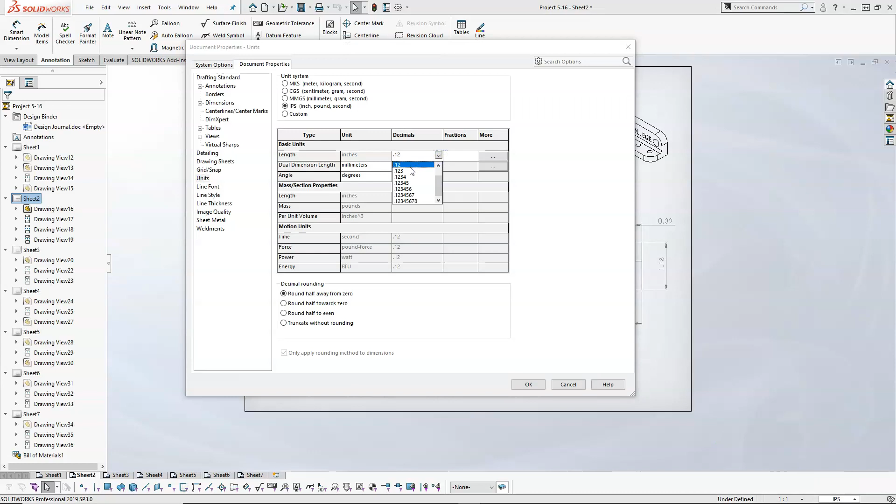Well, I'm still in millimeters, grams, and seconds. So see if that'll come back. So occasionally there's this weird thing, you have to change it and then change it back. And I'm not really sure what's going on there, but I've noticed that depending on the template, sometimes it doesn't carry over. All right, so that gives us enough to start with.

So I'm just going to go through and do a real quick look. So sheet 3, we had the steps and the pins, and then got a little carried away with the diameters there. So I have to decide: do I want to stay with the hole callout? Kind of like the through. So come over and modify that one to a 2 times.

We ended the last video on this one, and I went ahead and did pretty much the same thing to the other. So to be consistent, make sure. All right, so it's pretty difficult to get a perfect print on the first pass through. There's always a second or a third pass that is going to take you into that next level. So, one more hole callout, and one more 2 times.

So the downside to the 2 times, if this were an actual Hole Wizard item, it would give us an instance count, and it would put in the 2 for us. The problem is going to be that if for some reason we put in a third, this is going to have to be manually updated, just like the radiuses are going to be manually updated. So we're going to lose the associativity. It requires that we go back and manually change those.

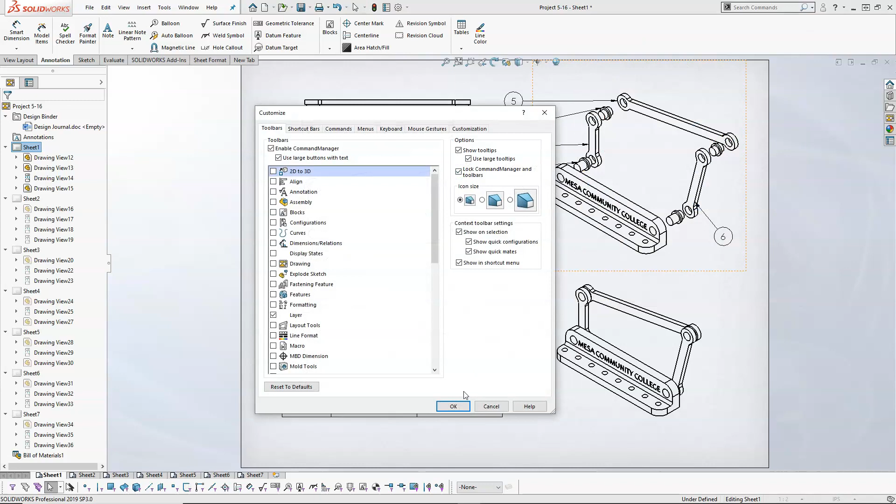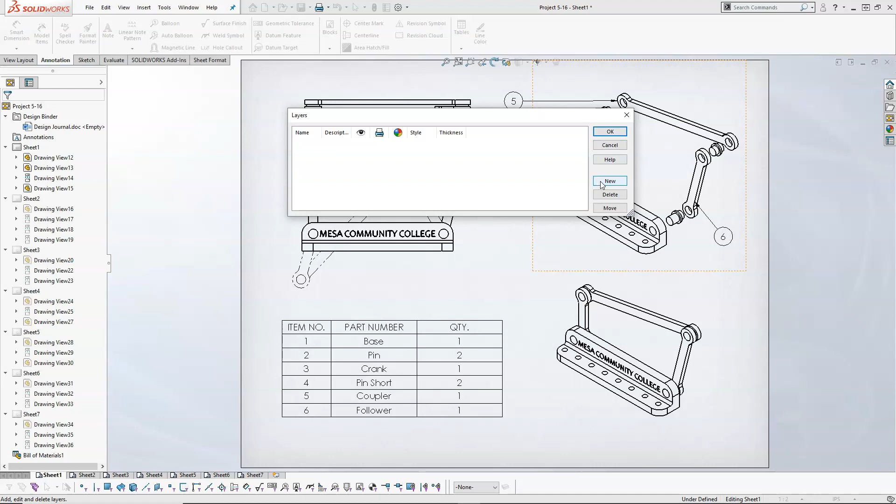Okay, so with layers, these are things that we're going to start building into our template. We're going to look at units and the standards, and go through the process of deciding what it is that we would like to have built in. So one of those things can be the layers. And so if I do a dims layer, we'll see if I can pick out my favorite color for dimensions.

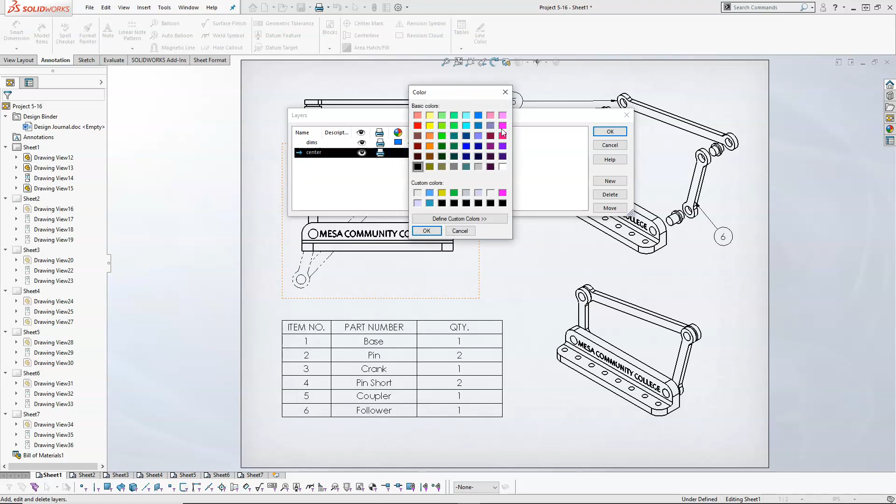And then I'm going to create one for center. And centers I like to have kind of bright in the magenta. All right, so very visible. And those give me a couple to start with. And when I activate, I can come over here and window pick, and window pick. And on the parameters on the left, we're going to be able to pick the layer for that selection.

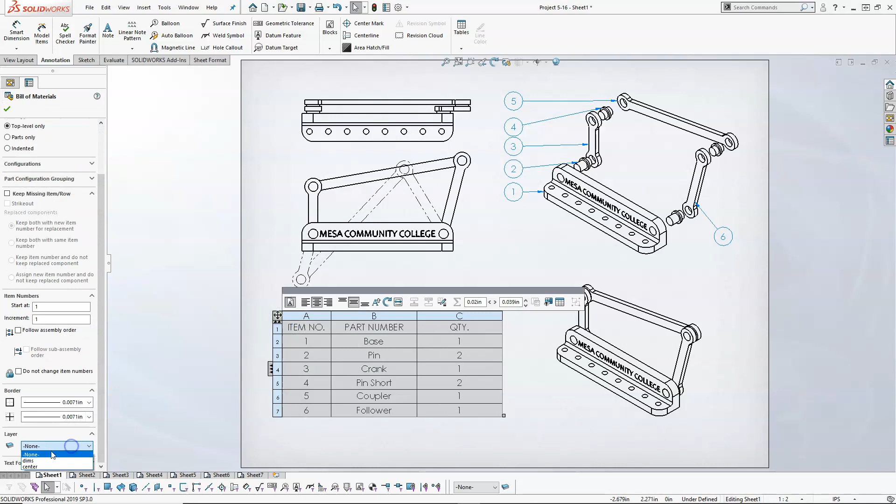So that puts it in. Pretty much can do the same thing with the bill of materials table, and it gives it just a little bit of contrast, maybe not so kind of fading into the background there.

Alright, so we have a lot of dimensions. This is where the filters can come in. If you do not have your filters on, you can hit F5 on the keyboard. There's also a view? I'm going to have to look for that one. I know there's a way to get to it, but I've always hit F5, so don't think about it.

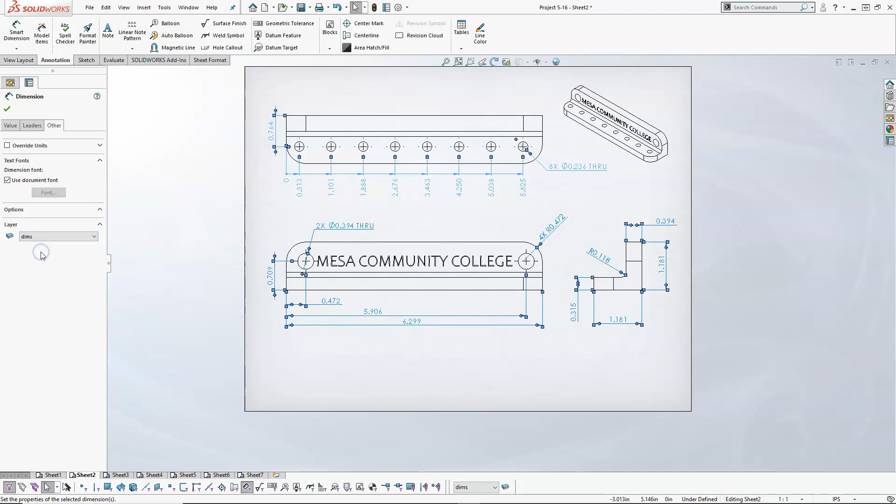Alright, so I'm going to filter dimensions and hole callouts. And when we pick, the dimensions should be the only thing that pops up. And if we go over to leaders, no, Other, then we get to the layer. So we set that to dims, accept, and that cleans it up a little bit.

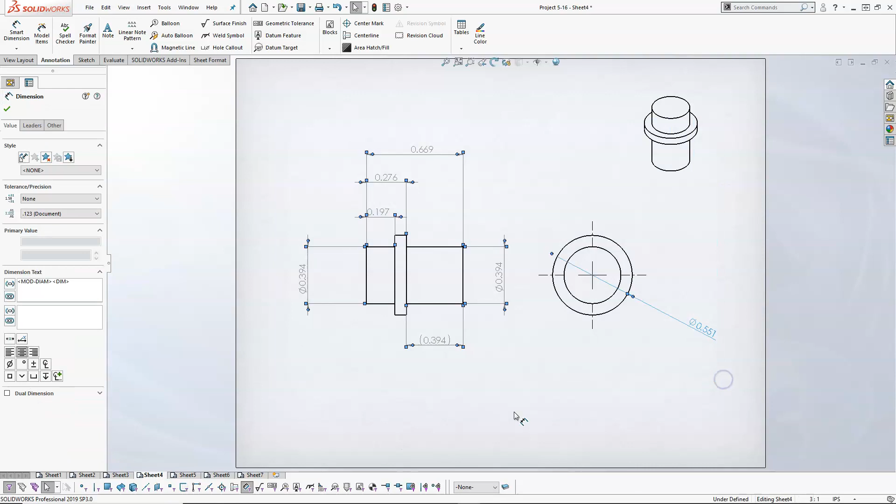So I'm going to go ahead and run through all of the sheets while that filter is on. And I can also come back to the layer toolbar and it will have the same effect. And we can update and get those to look a little cleaner. Alright, so a couple more. And one more.

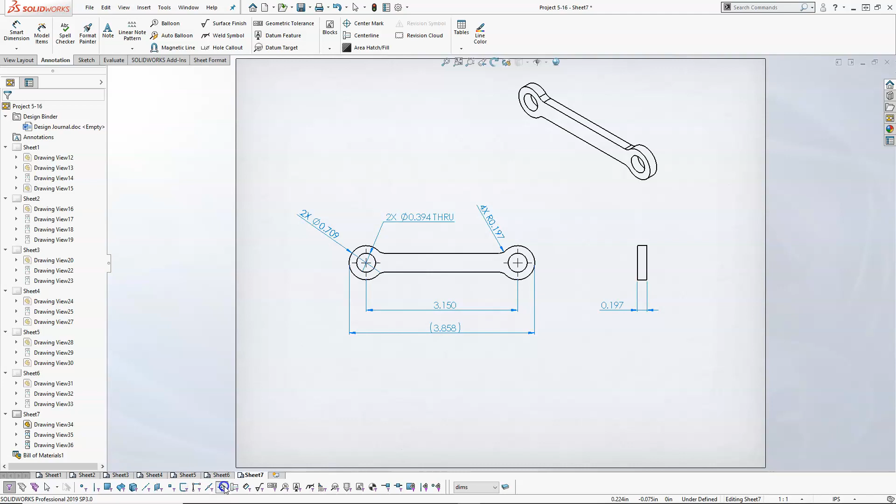Alright, so since we're in this group, I'll go ahead and turn off the dims so that I can select something else. Let's see, we do have a filter for center marks. I don't have any center lines, but center lines should also be in that group. And I'm going to set those to center.

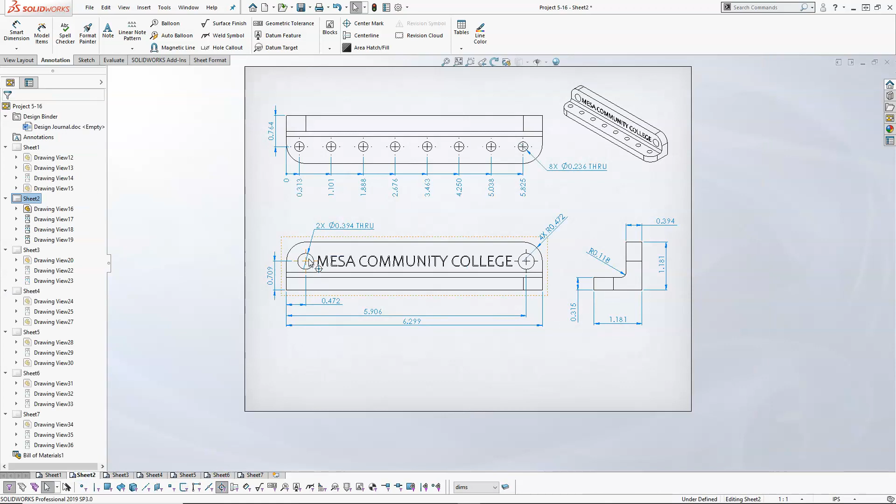And we'll just go through real quick and see if I can pick all of those up. So that one only has the one. And maybe we'll go back and we'll add a center line on those just so that we can see the process. Okay. And then pretty much the same thing. Alright, those are looking good.

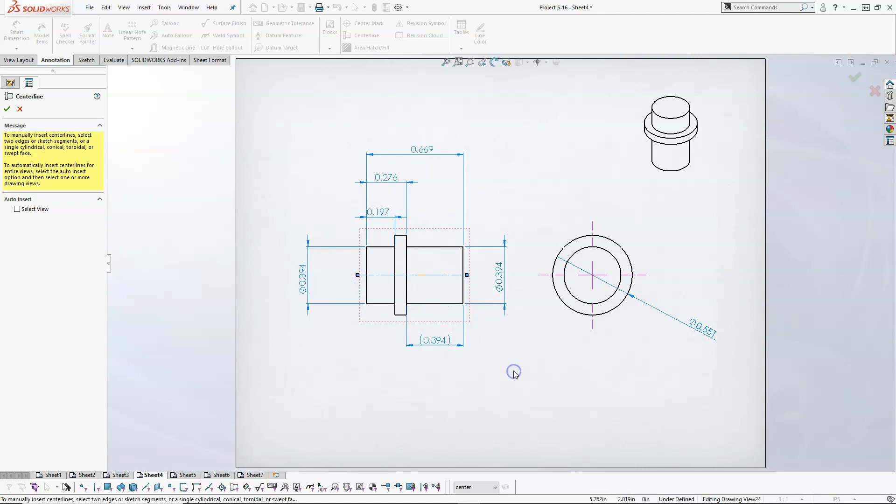Alright, so if I wanted to add a center line, again I gotta turn off my filter. We're going to set center as the current layer, and if I pick center line, I should be able to pick two objects, and that gives me the start, and then that will set my center line through the cylinder. I'm going to go back the other way. Alright, and then if I pre-select, holding down the control button, that should have the same effect.

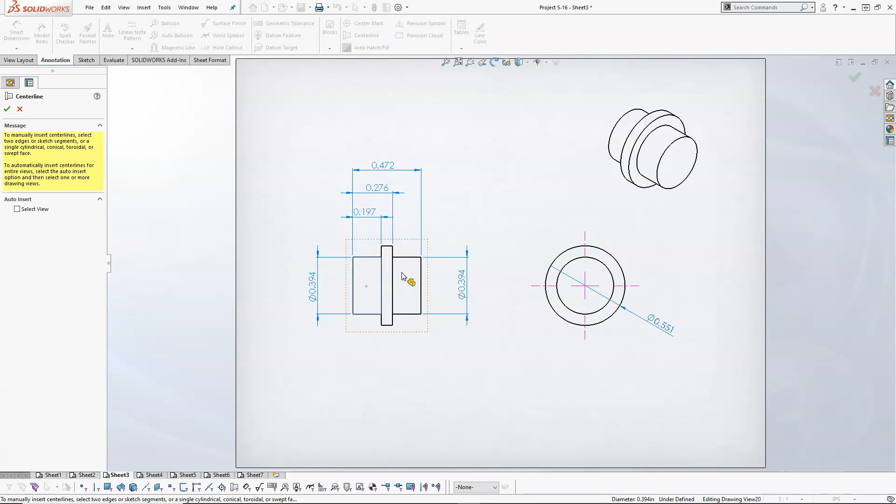And if I pick the face, nope, I didn't like the face. Sometimes it will get it. So, alright, so that gives me a little more contrast in the geometry. Hopefully makes it a little more readable.

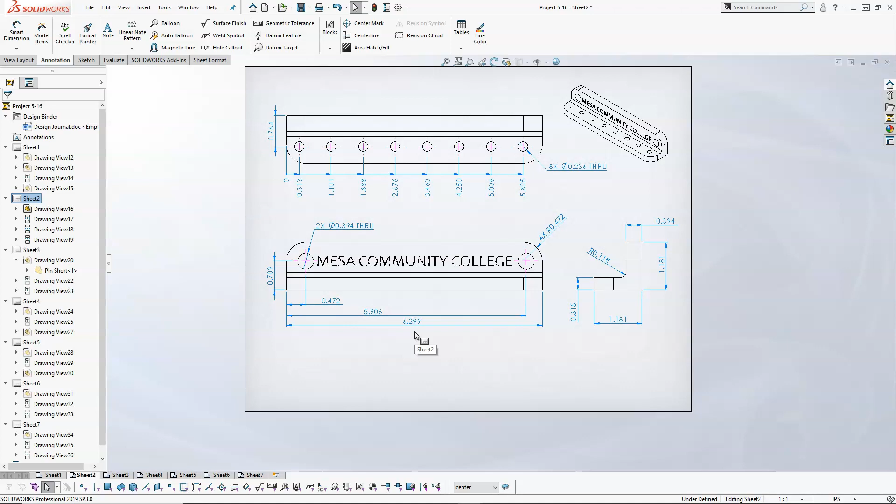Okay, so next, we'll probably only take one or two of these and look at the full dimensioning on it. All right, so we set everything to 3 decimal places, which industry standard in inch is going to be plus or minus 5 thousandths on our tolerance, meaning that this can grow to 6.304 to 6.294. All right, gives us a range. I'd like to make that a little bit more open.

So if I go to 2 decimal places, depending on again the industry, it could be 10 thousandths, could be 15 thousandths. 15 thousandths is pretty close to half a millimeter. So we're looking at making that a little bit more wide open. And 6.300 does a pretty good job. The hole locations, however, are going to be a little more critical. So we'll leave those at plus or minus 5. And we would go to a little tighter tolerance or start looking at a geometric tolerance if that was really critical.

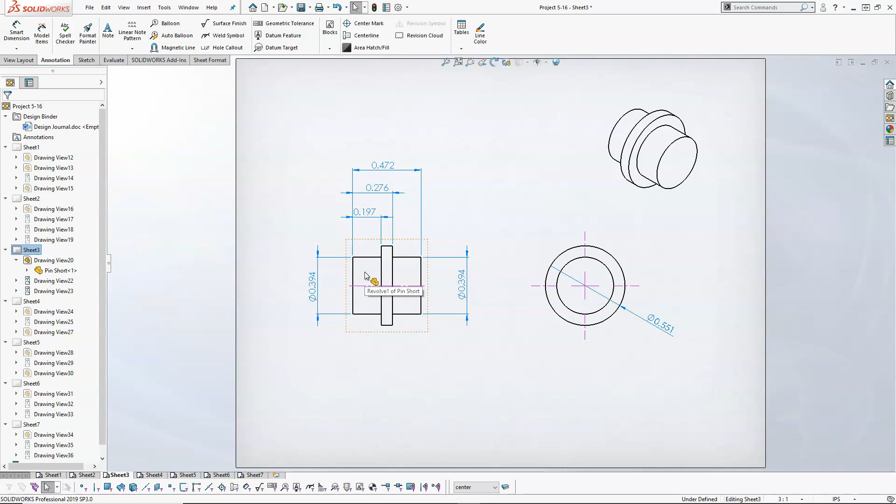Alright, so looking at the critical dimensions, one side of the pin is going to go into the base. The other side is going to go into the crank. And so one of these needs to be a press fit to pick the side that's going to be stationary, and the other side needs to have a looser fit. So when we start doing tolerance analysis, we're going to be looking at limit dimensions.

So being able to modify and go through these dimensions, a little advanced, but we're going to put some basic dimensions on it. And I probably shouldn't use basic, but let's make it a limit dimension of minus 5 thousandths. So this is not including any calculated clearance, but it does give me the start of the geometry to say, yeah, these have some dimensions in them.

So for this 394, if this is the press side, actually, I think I went the wrong way on that one. Alright, so we need to tighten that tolerance up. I was talking and not paying attention to what I was doing. So 394, and actually if we made this one, well, we need to look at the hole sizes and refer to one of the charts.

So let's make it a 393 to 394 would go into a press. So yeah, .001. Alright, make it 1 thousandth. There we go. So a lot tighter tolerance, which means we have to do a greater process. And that also means that I probably want to bring this out to 4 decimal places to really call out that, hey, there's something critical going on there.

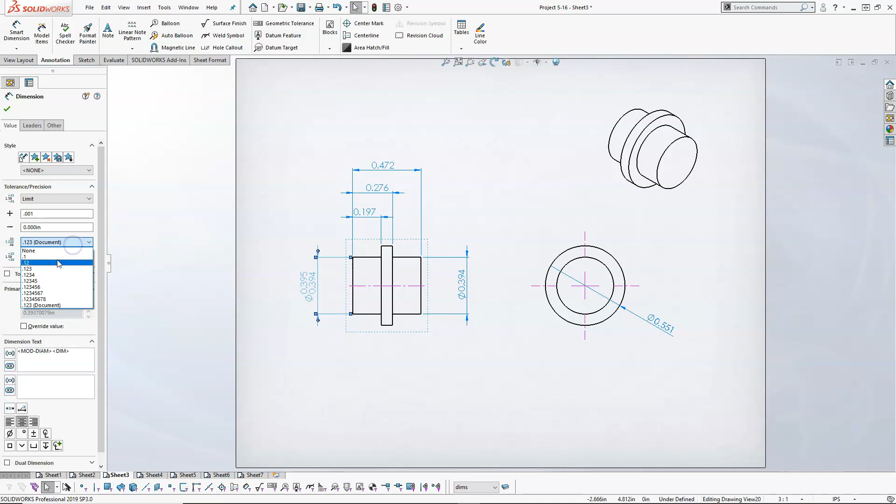And on this one, we want to make it a little bit bigger. So its limit dimension, let's just say we'll go 1 thousandth bigger. A 2 thousandths press, if both of these got to their maximum material conditions, which is a term we're going to discuss at length a little later. But as big as it can get or as small as the hole can get, then I would have 2 thousandths of press, which is quite heavy.

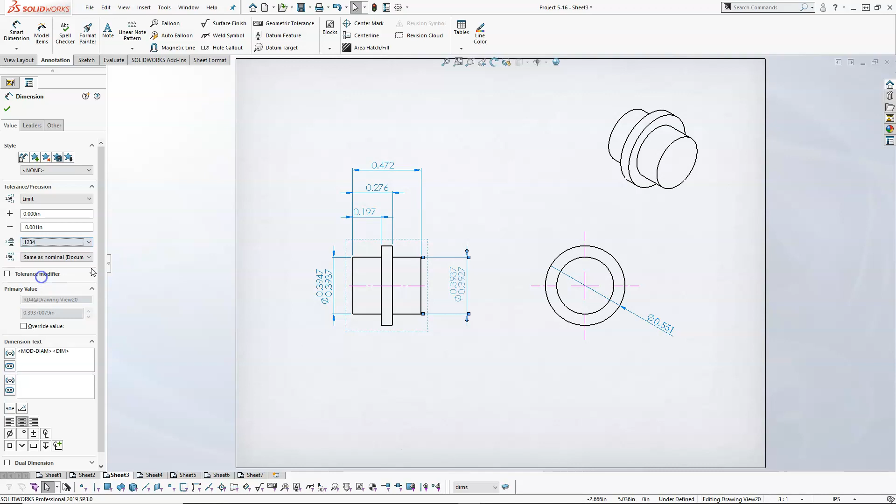Right, on the other side where it's going to clear, then we reverse that logic, that geometry, and say this becomes our minus. And we don't want it to be too loose, so we'll stay with 1 thousandth. And maybe when I go back through and do a little more tolerance analysis, we can open those up. Oh, so that actually comes over to the other sheet.

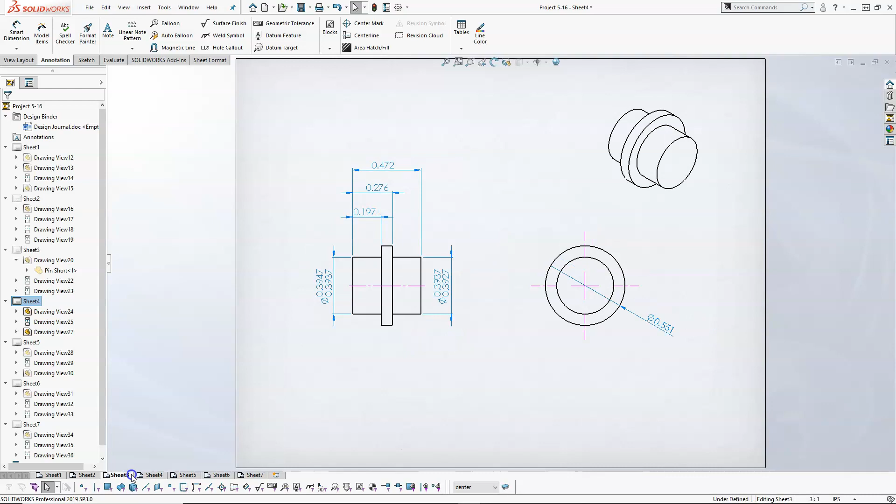Oh, and this is the one that goes through, so I reversed those. Alright, so one of those was the crank, actually, so we'll catch up with that one. Alright, so the 10 millimeter side is the one that's going to press into our geometry. And I'm missing my decimal point. I keep missing that for some reason. Okay. And 4 decimals.

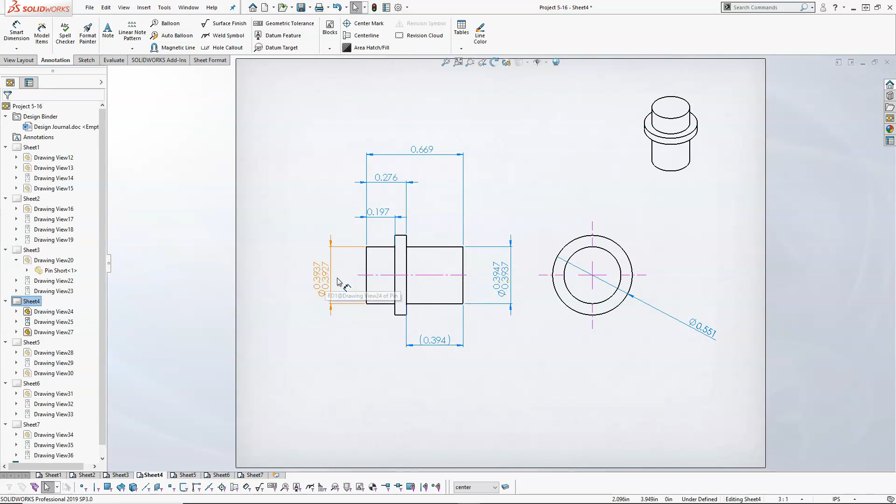And then, okay, so 393 and also 4 decimals. Alright, so from the base to the pin, so probably should adjust that order. Alright, so we're seeing one size up, one size down, and then catching my mistake, the one that I'm going to be looking at next needs to be a clearance, so it's going to get a little bit larger, while the pin got a little bit smaller and provide more movement.

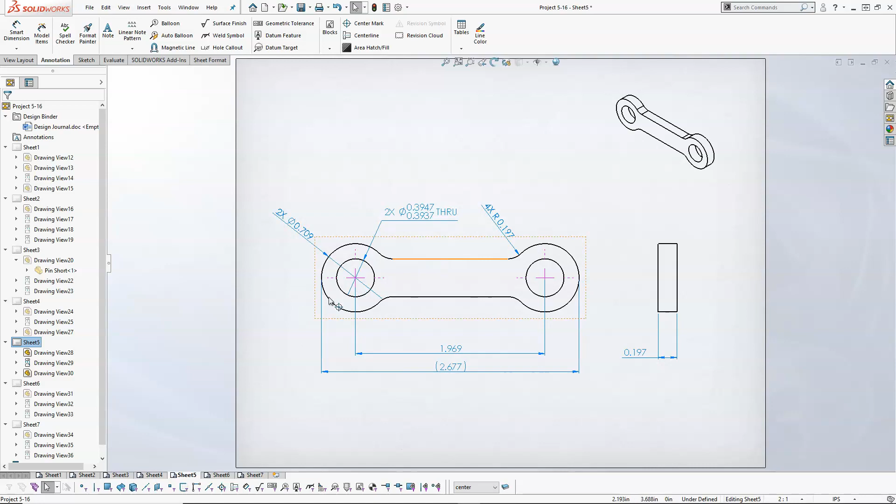So we're going to need to go through the rest of the documents, the sheets, to catch up to those. All right, that gives you an idea of some basic tolerancing. Not really focused on the tolerancing, just want to give you an idea of some of the things that we're going to go through to clean up and perform these functions in the drawing.